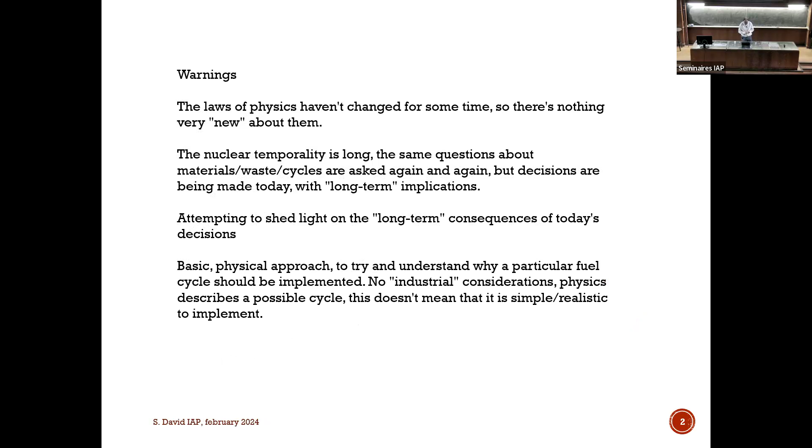Okay, so first the warnings: the laws of physics do not change, so I don't show very new things about nuclear energy. It's always the same: fission, neutrons, breeding, and so on. I just want to start with only one slide on the energy context, or energy problem, or climate-energy problem.

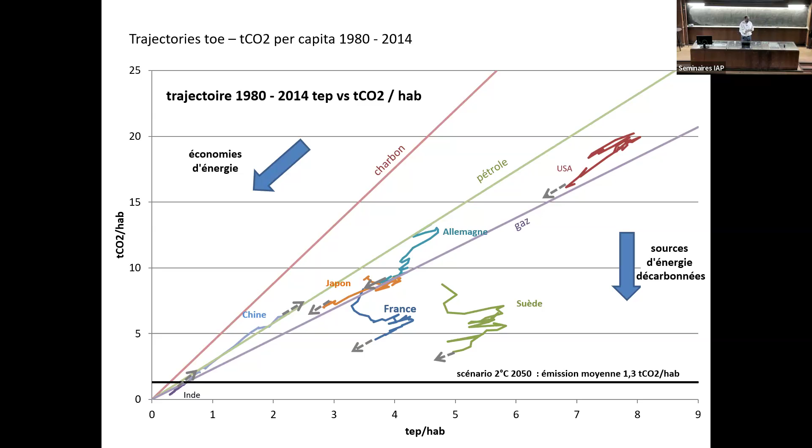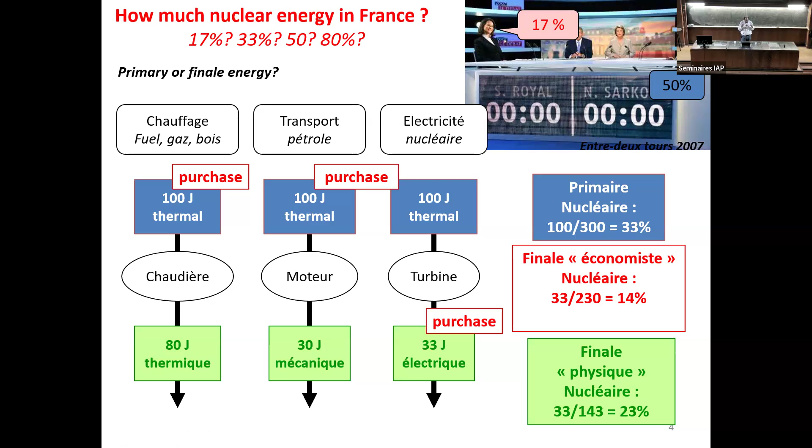But the quantity of nuclear energy in this final-energy case is only 23%. So what I want to say is: if you want to show that we can stop nuclear power in France, you choose the red figure. And if you want to show that it's not possible, you choose the blue one. So there's always a bias in the discussion about how we count energy. Please be careful with that.

The projects, or reactors under construction today, are mainly in Asia. In China, perhaps 5 reactors per year are being constructed. The market is very calm in Europe. You can see the EPR project, the main French reactor being built today: 2 reactors in operation in China, 1 in Finland. Flamanville should start this year, maybe. And we have announced 6 plus 8 EPRs in the coming 10-15 years. So it's a relatively calm market, I would say.

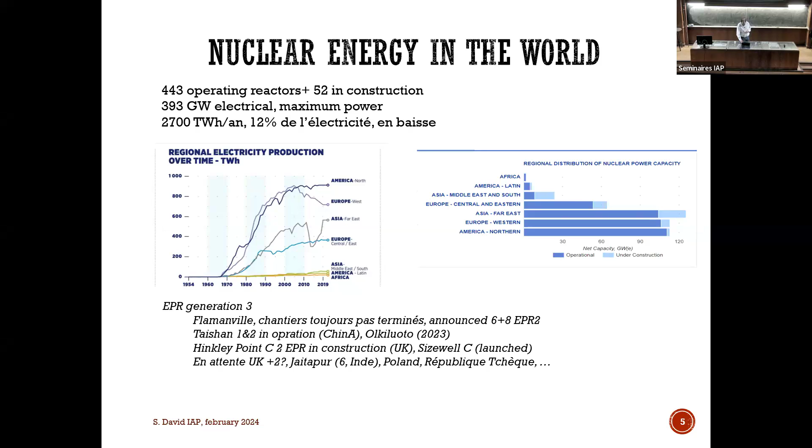So I will talk about the sustainability of nuclear reactors, uranium resources, and so on. We have to make some hypotheses about nuclear demand in the future. I will take factor 1 as the low hypothesis and factor 10 as the large hypothesis for nuclear demand, and discuss the capacity to produce this kind of energy based on nuclear resources—only fission. There is no fusion energy in the global perspective, as far as I know. Yes, it's a very big process, very long, but I don't think fusion is part of this.

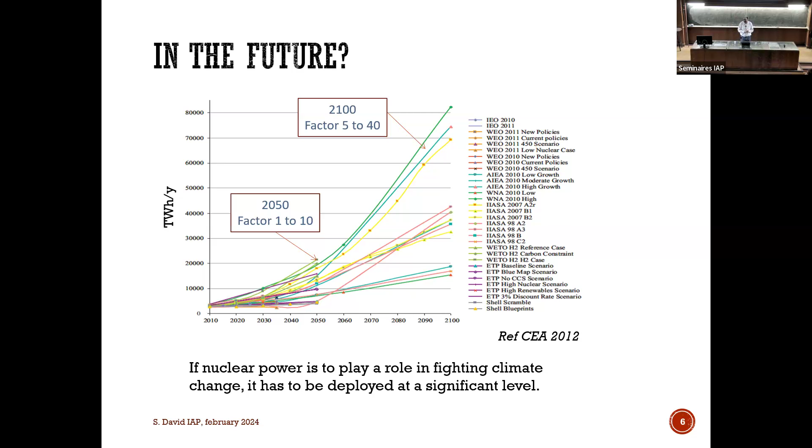Nuclear power here is mainly dedicated to electricity production for very concentrated, urban populations in world regions that already have nuclear reactor technology. I want to show you the results here - you can see the red line. Factor 8 is a very aggressive scenario for nuclear deployment, I agree, but in Asia, for example, this factor 8 at the world level corresponds to around 2,000 kilowatt hours per year per capita, versus 4,000 in present rich countries. I'll show you the French case today: we are at 7,000 kilowatt hours per capita per year. So the factor 8 at the world level is much, much less.

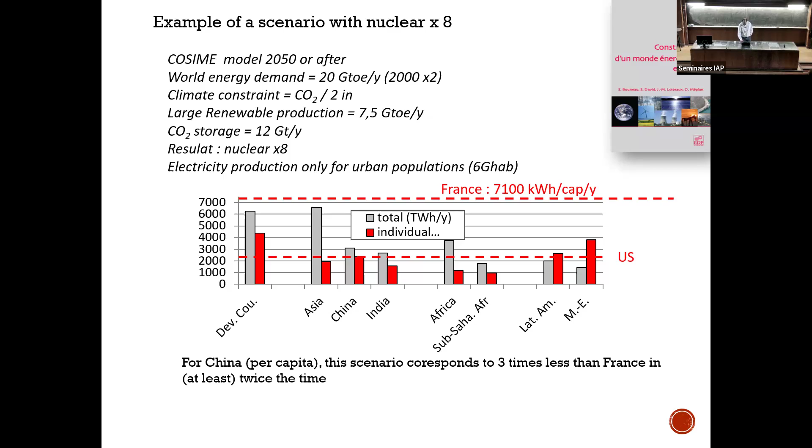That's the French case that was achieved in 15 or 20 years during the 70s. So perhaps it's not so unrealistic, when we see the economic dynamics in Asia for example, to reach this kind of nuclear demand in the future.

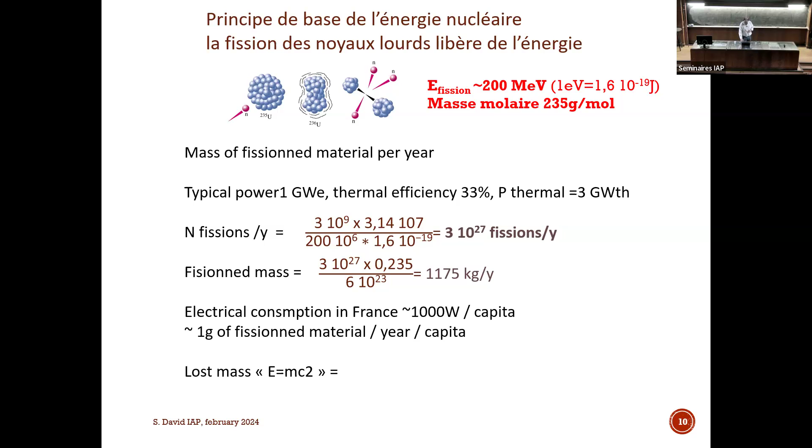In the ground we have only 3 main heavy nuclei: uranium, with 2 isotopes - uranium-234 is completely negligible, so uranium-235 and uranium-238, which I'll call U5 and U8, and thorium-232.

Unfortunately, the capacity of a nucleus to fission when it meets a low energy neutron is completely different between U5 and U8. Uranium-235 has an odd number of neutrons, which leads to a high capacity for fission by a neutron. To simplify, we can say uranium-235 is a fissile nucleus - a neutron can induce fission on U5 but cannot on uranium-238.

Unfortunately, natural uranium contains less than 1% of uranium-235, so we don't have so much fissile element available in the ground.

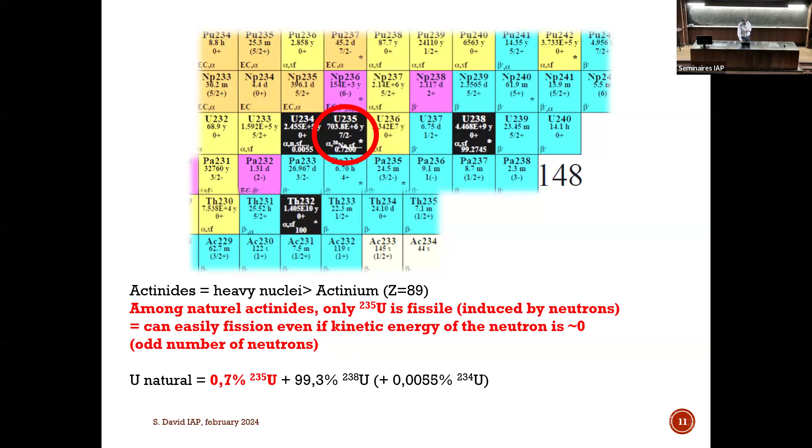So you also know that we have a chain reaction in the reactor. A fission emits around 2.5 neutrons, and of these 2.5 neutrons, we only need 1 to induce a new fission, to produce energy and new neutrons, and so on, so the chain reaction maintains constant power in the reactor. This is really easy in terms of neutron balance: we produce 2.5 neutrons and need only 1 to maintain the chain reaction, so we have to manage 1.5 neutrons being captured by other nuclei. It's really easy here, though we'll see that in other cases it's not so easy.

The neutrons must have a high probability of fissioning the material, but you have to remember that the concentration of the fissile nucleus in uranium is very low, less than 1%. If we look at the cross-section, it represents the probability to induce such a reaction, fission or capture. Capture is a very simple reaction: the neutron is kept by the nucleus and the life of the neutron is over.

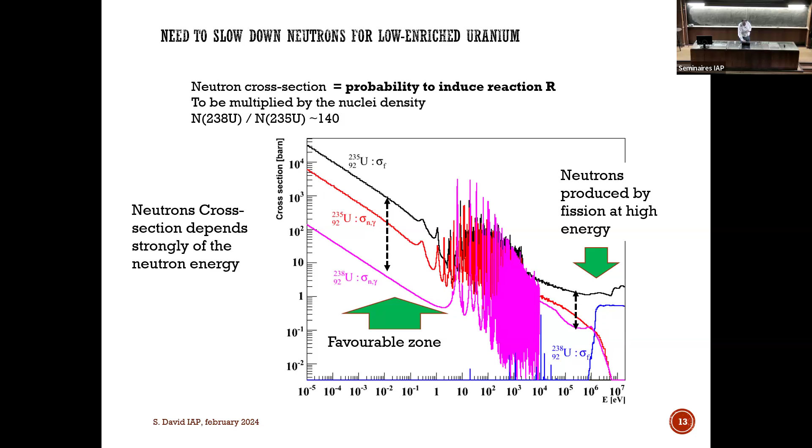So today's nuclear reactors use a neutron moderator, which is water, because water contains hydrogen. Hydrogen is light, and a light nucleus is very efficient at slowing down neutrons. All reactors in the world work like this: neutrons are produced at high energy, the moderator slows them down, and fission is produced at low neutron energy. In France, we use pressurized water reactors, with fuel enriched to around 4% uranium-235.

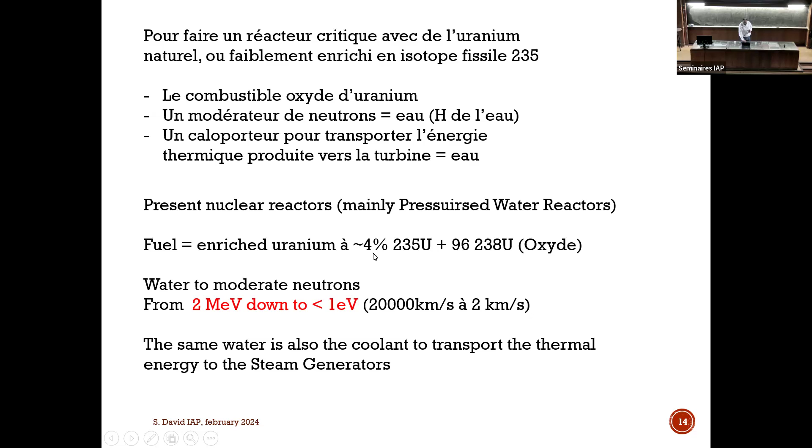So you see the very basic principle of the reactor. The enriched uranium is here in the core. We produce thermal energy, and the rest of the reactor is made to transport that thermal energy to the turbine and transform it from thermal into mechanical energy and then into electricity.

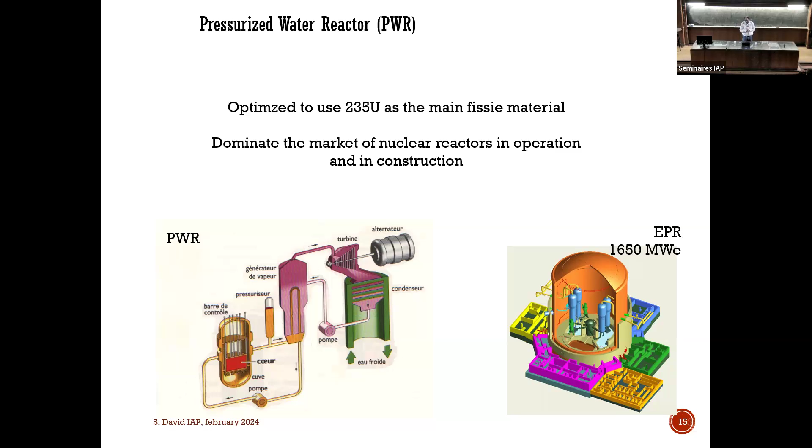So this is the present PWR, pressurized water reactor. This is the EPR — it has exactly the same basic behavior: enriched uranium at 4%, water to slow down the neutrons. Water is also used to transport the thermal energy to the turbine; it's again exactly the same.

From the point of view of the fuel cycle, we use UOX fuel. UOX just means uranium oxide, at 4% uranium-235. It is produced from natural uranium. Natural uranium is enriched, and during the enrichment process we produce depleted uranium, which still contains, let's say, 0.25% uranium-235. This depleted uranium is not used today.

The fuel remains 3 to 4 years in the reactor, and at the end we have lost a few percent of the fuel. 96% of the fuel did not react with the neutrons — it remains uranium-238. In the 4% that did react, we have produced plutonium, mainly by neutron capture on uranium-238.

We have also produced heavy nuclei such as americium, curium, and neptunium by cumulative neutron capture on uranium and plutonium. And of course we have produced fission products, the result of the fission of uranium-235. These numbers are order-of-magnitude figures for the French case: we produce about 10 tons of plutonium per year, 1 ton of minor actinides, and 50 tons of fission products. Of these 50 tons, only about 10% are radioactive with a long period, around 5 tons per year — and this, of course, is the nuclear waste.

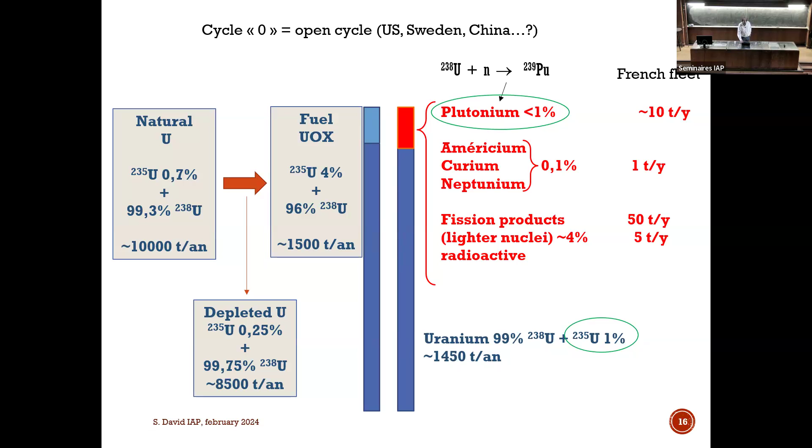In France, we reprocess the fuel, so we extract the material which can be used again in the reactor. Which contain fissile material, as is the case for plutonium. So the plutonium is extracted, separated, and we produce a mixed oxide fuel, which is spent again 3 or 4 years in the reactor. We also recover the uranium, because the spent uranium still contains 1% uranium-235, so it is a fissile element. We can re-enrich the spent uranium and produce a new UOX fuel, spent again 3 or 4 years in the reactor.

So we did this in the past, and we start again this strategy of uranium recycling. In terms of power, MOX in the French case is around 10% of the power in French reactors. And if we recycle the uranium, we have another gain of, let's say, 10 or 15%. So for the same energy produced, we can reduce consumption of natural uranium by 20 or 25%. But it will be very complicated to increase this uranium saving further with the same reactor technology.

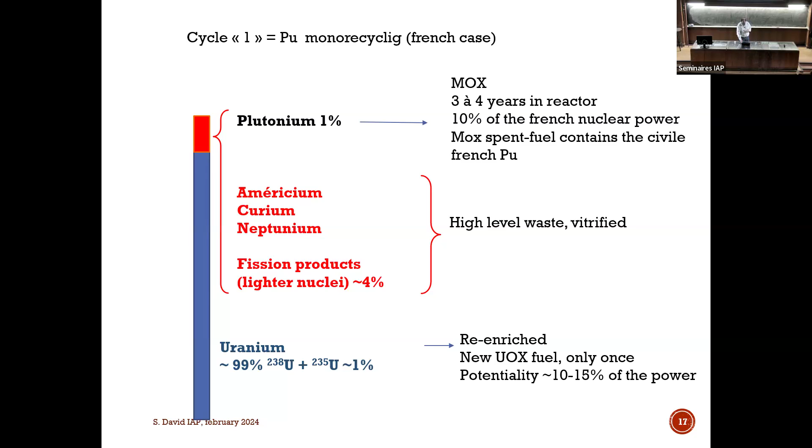How expensive is it energetically to recycle? There is a lot of question about this. I would say it is the difference of two large numbers. Large numbers have error bars, and so the result is zero plus or minus something. But there is a lot of discussion - is it economically good to do so? It's not sure. But I mean, the advantages are elsewhere.

I can answer after. Okay, so to finish this part: the order of magnitude for one reactor of 1 gigawatt - it consumes 200 tons of uranium, 30 tons of fuel, 1 ton of fission. So the real energy use of present reactors is around 0.5%, that's 1 ton divided by 200. It's completely normal because we use uranium-235, which is 0.7% of natural uranium, so it's very close.

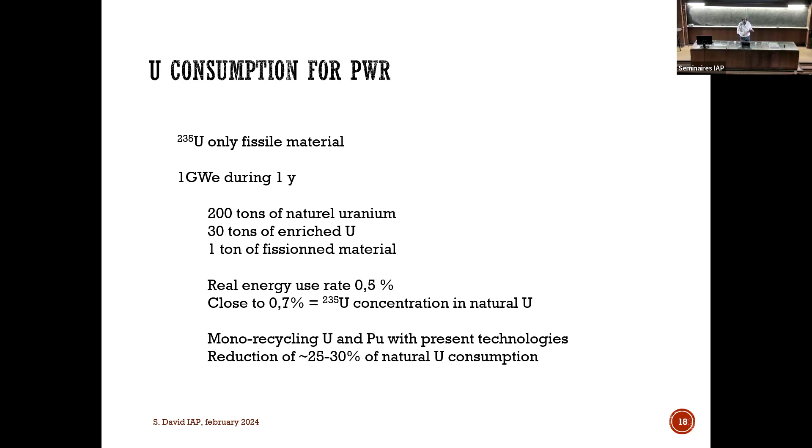And again, we can reduce these 200 tons by 25%, so we can reach perhaps 150 tons of natural uranium consumption per reactor per year if we do not change the reactor technology. So in terms of capacity to be deployed, considering this uranium consumption, I made two very simple scenarios of nuclear demand in the future: a factor of 2 between today and 2050, and this famous factor 8 between today and 2050 or 60.

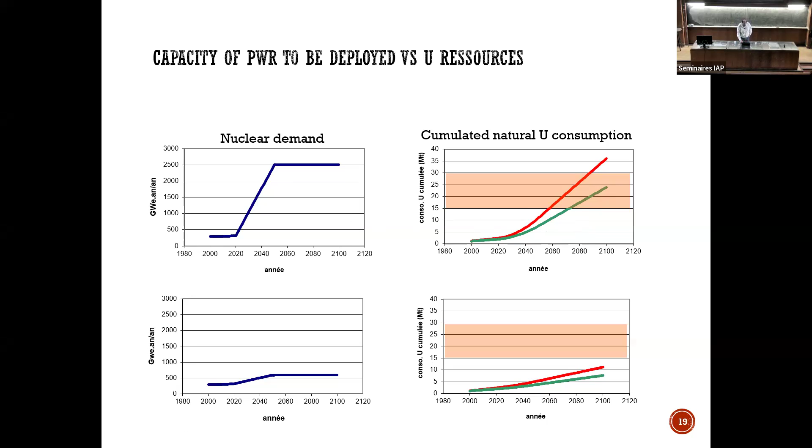Okay, so what happens next is this. We know that we can use not only 0.5% of uranium, but 100% of the energy content of uranium. The principle is very simple. The idea is to use uranium-238, which is not a fissile material, but when a neutron is captured, we produce plutonium-239, which is a fissile material. So the idea is to have a system, a reactor, containing uranium-238 mixed with plutonium, and every time the plutonium fissions, it is produced again - bred by a neutron capture elsewhere in the reactor on uranium-238 to produce the plutonium which has disappeared.

So this is a breeding principle. In this case, the plutonium is constant. We have 1 ton of plutonium to produce 1 electrical gigawatt during 1 year. And 1 ton of plutonium disappeared and 1 ton of plutonium produced by uranium-238, neutron capture on uranium-238. So at the end, we have consumed only 1 ton of uranium-238 for the same energy production. So we divide by 200 the consumption of uranium to produce the same energy.

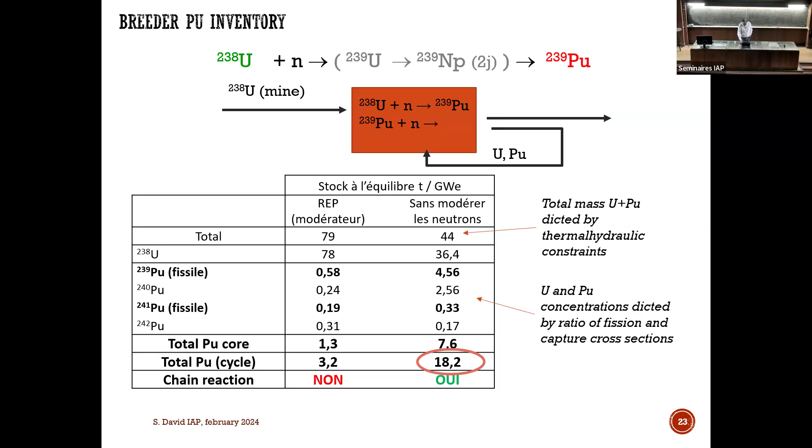And I have to mention that the multi-recycling of the plutonium of the reactor is mandatory. We cannot avoid it, because every 5 years we have to remove the fission products. We have to replace the uranium-238 which has disappeared, and the plutonium has to be kept. So it goes outside the core, it is treated, and it comes back in the reactor. So we have to multi-recycle and to close completely the fuel cycle. It is, again, mandatory. So 20 tons of plutonium for 1 electrical gigawatt.

If you look at the French case, it's 60 gigawatts today. It's around 1,200 tons of plutonium. We have to dispose of this material to start the equivalent of the French fleet with breeder reactors the day perhaps we will need to reduce the uranium consumption.

The situation today is that in the spent fuel, we have around 400 tons of plutonium, perhaps 430 tons of plutonium available, I mean civil plutonium. So you see that it's not so obvious to start a breeder fleet because we don't have enough plutonium to make the transition at constant power of the fleet today and the fast breeder in the future. So we have to accumulate the plutonium again and again to reach 1,200 tons of plutonium available in the spent fuel. So it is a very big question.

And the status of the plutonium today is not a waste. It's simply a valuable material, because we think that one day perhaps we will need it to start the fast reactors.

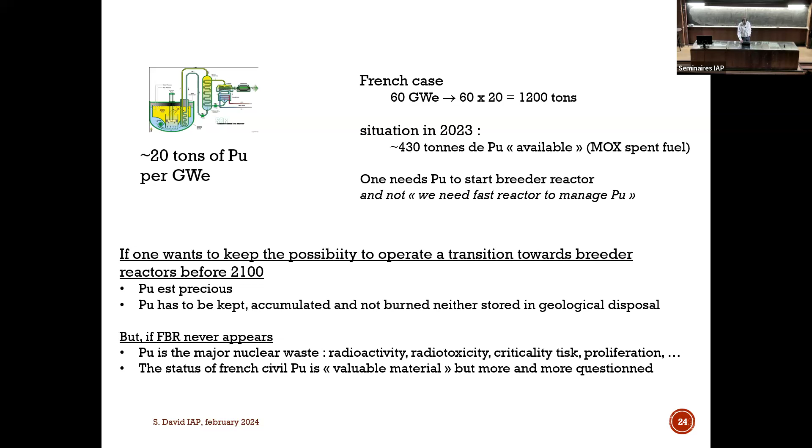It dominates the radioactivity of the spent fuel, the radiotoxicity, the proliferation issue, the criticality risk during storage, and so on. So the status of plutonium is completely dependent on the long-term hypothesis or the long-term strategy of France. Long-term means 50, 60, 70 years. And it's very interesting to see how we can manage this long-term strategy, which is based on very basic physics, I would say. So the status of French civil plutonium is valuable material, but it is more and more questioned today.

The breeding paradox, just to finish, I have 5 minutes about the reactors at the end. Breeding paradox is another way to see the mass of plutonium: 20 tons is roughly the plutonium which is produced by a PWR during its whole lifetime, during 60 years. 60 years times 300 tons per year, it's around 20 tons. So you can see here that we can make perhaps the transition between sustainable reactors only at constant power.

So first, the breeding cannot ensure nuclear deployment. If I consider a factor 8, we will have to make a factor 8 with PWR, and we will have to consume all the uranium present on Earth or available, I would say. And then we will be able only to make the transition between a sustainable nuclear technology. So even if we don't use any uranium or very, very low uranium in the fast breeder reactor, they are completely dependent on the resource, and the resource we will be able to extract to operate the PWR, to produce the plutonium, to start the fast breeder reactor.

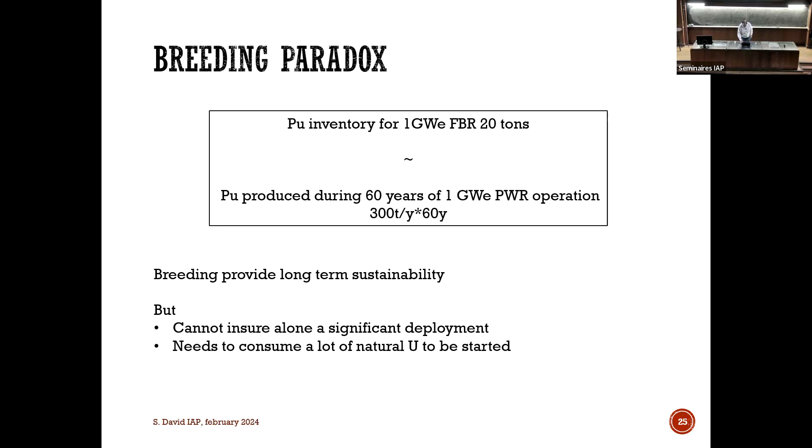I'm not sure to be very clear, but we can discuss about this during the questions. I will finish very quickly by a very fast overview of the reactor technology, because we are talking about startup, about EPR, about molten salt. For me, it's very important to separate the different technologies into two categories.

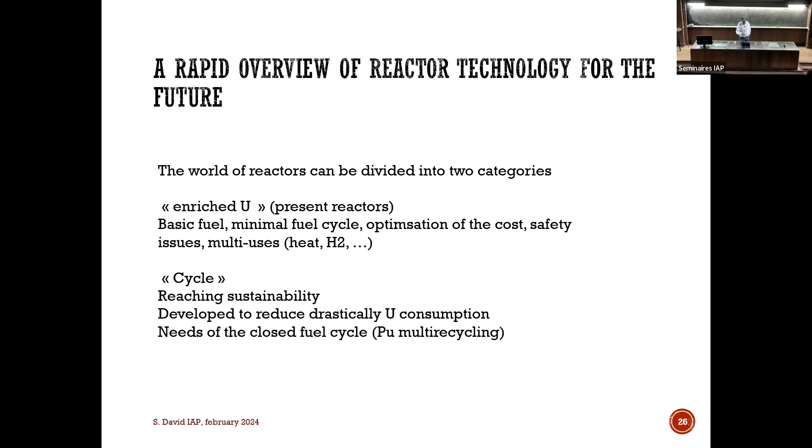The first is based on enriched uranium. There is no consideration of the fuel cycle, sustainability, or optimization of uranium consumption. The challenge here is to improve the safety, reduce the cost, and so on. And the second family, or the second category, is very much thought out to operate breeding and the fuel cycle. And it's very complicated for me to compare these two types of reactors because they are not conceived in the same way and the objectives are radically different. So all the projects we have today to produce electricity are based on enriched uranium.

It's the EPR in France, AP1000 in the US, CPR1000 in China, VVER in Russia, and so on. It is the same reactors, water-cooled, uranium-enriched, and there is no consideration of fuel cycle and the consumption of uranium.

And we have the same kind of reactor, but with a reduced power and a reduced size, which is called SMR, small modular reactor. For me, it's too early today to understand why or if this SMR will be competitive. But again, it works on the same principle as the big ones, enrich uranium, water cooled.

Okay, but perhaps we can produce with these small reactors other things than electricity, perhaps industrial heat, hydrogen, desalination, and so on.

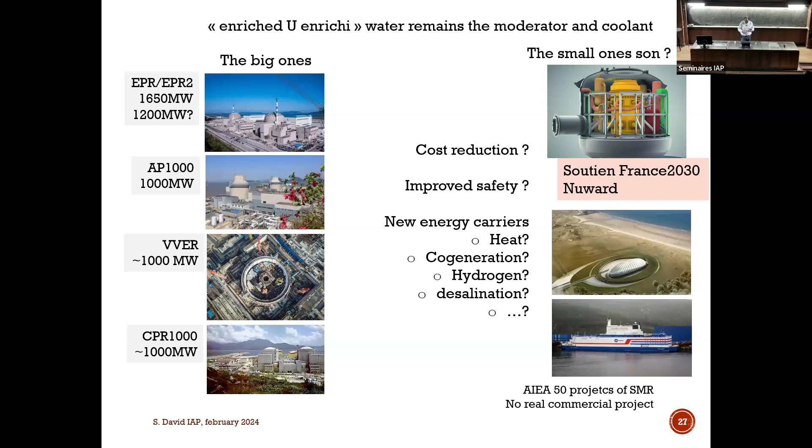After that, we have some other reactors which are dedicated to producing high temperature heat. For example, the gas-cooled reactor or the solid fuel cooled by molten salt and so on. So there is a lot of different reactors dedicated to production of heat. But here again, there is absolutely no consideration of the fuel cycle.

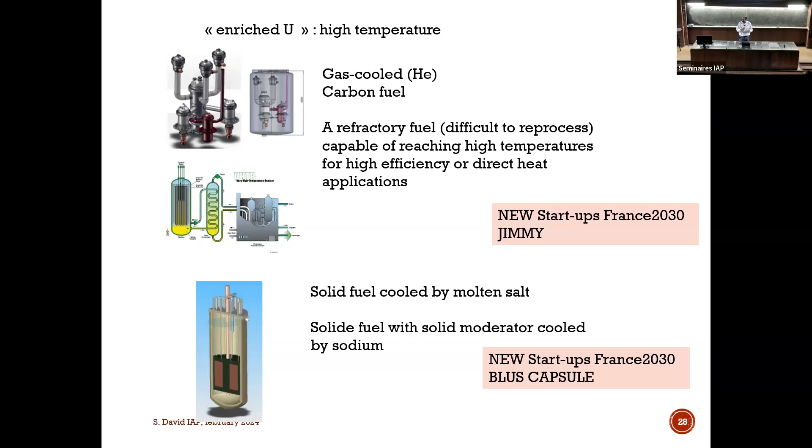And these fuels are so difficult to break, I don't know how to say it. So we cannot imagine recycling the fuel, the spent fuel, of this kind of reactor. It is dedicated to heat production.

And on the other side, we have the breeding reactors based on the Superphénix or Phénix technology, mainly sodium-cooled reactors, so the BN 800, 600 in Russia. For example, China has also started the construction of two fast reactors based on sodium, and we have some startups in France working on this technology, Otrera, Hexana, for example.

The alternative is lead. Again, there is one startup in France which is working on this, it is Newcleo. And at the end, these reactors, I think the objective is to operate the breeding and to make nuclear power with fission sustainable.

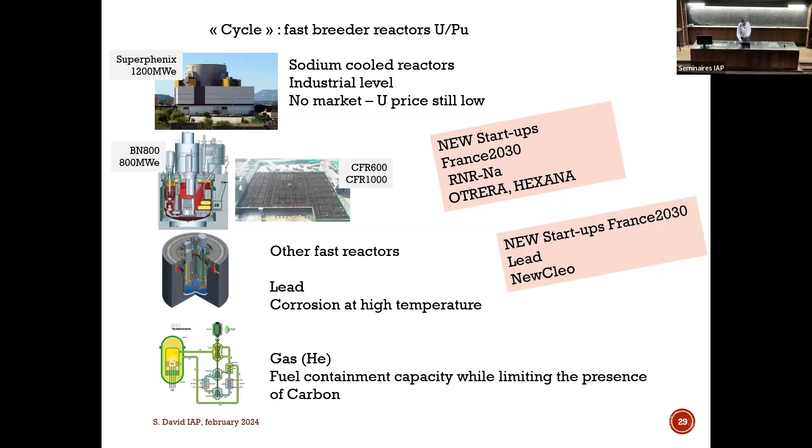And just one word on molten salt, because we are speaking a lot about the molten salt reactor, which is a very specific, very special reactor. The fuel is not solid anymore, but liquid. It is a salt. It contains the actinides, uranium, plutonium, thorium. I don't know, you can put everything in the liquid fuel.

It is a very interesting reactor, I would say, on paper, with attractive benefits. Again, we can imagine a lot of fuels. We can reprocess the fuel online because the fuel is liquid, so it circulates. So we can remove a small part of the fuel, treat it, and put it again in the reactor.

And we can imagine passive evacuation of the power. Because the fuel is liquid, we can spread it in case of an accident and remove the residual heat very easily. Okay, so it is the theory.

I often say it is a dream of the physicist, but a nightmare of the chemist, because when you see how you build such a reactor, it becomes very complex in terms of chemistry, in terms of materials, and we have to manage the liquid fuel circulating in the heat exchanger and so on. But again, we have some startups in France working on this kind of reactor.

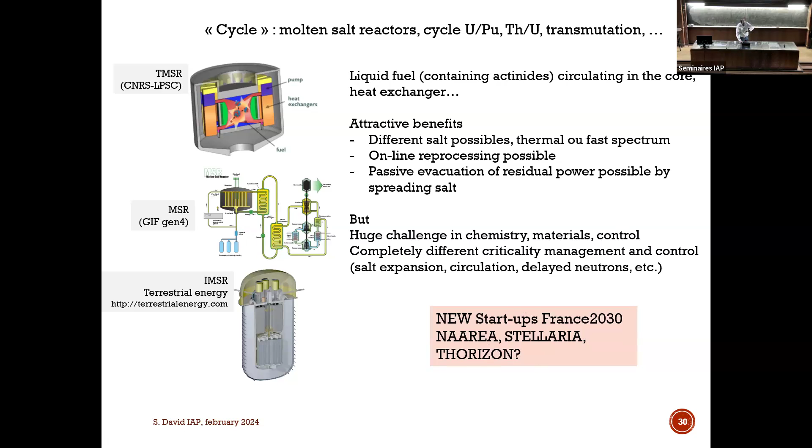So I am too late. This is my conclusion, but I can stop here.

Thank you very much for this very enlightening talk. Is there any questions?

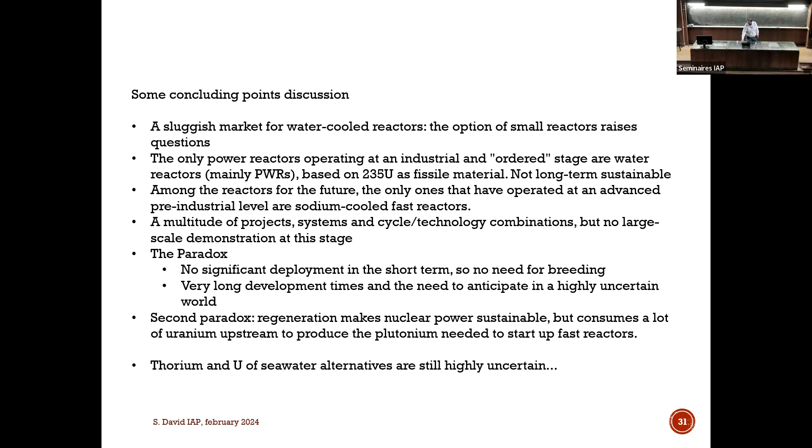Yeah, thank you very much. That was very illuminating. I have just one simple question. You mentioned that we had this technology before 2000 for the fast breeding, recycling power plants, but you also said that we stopped them. Was there any good scientific or risk reason for doing that, for stopping those? What was the reason underlying that?

Okay, a personal answer. What I understand is that at the beginning of nuclear energy, they thought that we should not have enough uranium to ensure a large nuclear energy production in the world. We were considering 2,000 reactors by 2000. It was the projection in the 80s.

So between this, we started the fast breeder reactors from the beginning to very quickly replace the PWR. During that, we had Three Mile Island in the US. So the accident completely stopped the nuclear deployment in the US. And we found a lot of uranium.

So in the 90s, we had Superphenix in France, but we had a lot of uranium, not so much nuclear power in the world, so no problem of uranium resource during 20, 30 years.

Okay, after that, you have the political situation in 1997, which has led to stopping Superphenix. But it is a combination between political situation and the fact that there was no urgent strategy to use this technology. And it is the same today with Astrid.